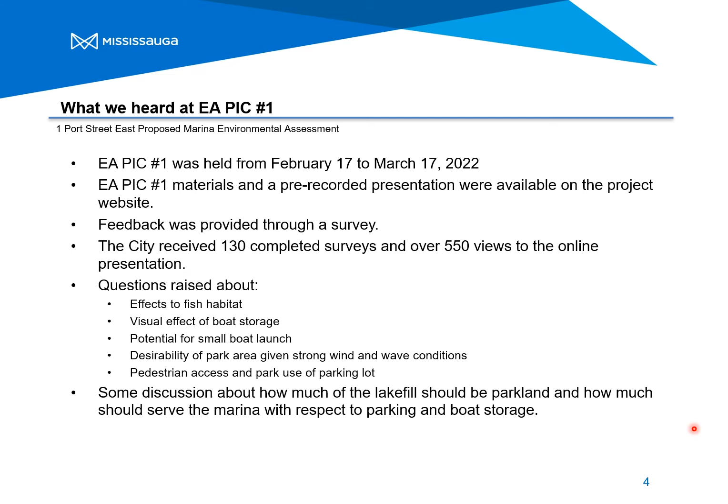We had questions about the effects on fish habitat, the visual effect of boat storage, the potential for a small boat launch, the desirability of the area for a park area given the strong winds and wave conditions, pedestrian access and park use of the parking lot, and there was also some discussion about how much of the lakefill should be available for parkland and how much this should serve the marina. Responses to these questions were posted in a summary document.

Through the survey, we also asked you to provide us with your perspective on the relative advantages and disadvantages of the small, medium, and large lakefill alternatives. We heard from you that the small lakefill alternative was the lowest cost, had the shortest construction period, and the least environmental impact, but was also too small. There was not enough parkland, not enough boat storage or slips or parking, and it really didn't add value to the community. Some respondents noted that there were no advantages to this option.

For the medium lakefill alternative, while many of you indicated it had more parkland, some responded that there were no advantages, and others responded that there were advantages with respect to cost, and that it was better than the small lakefill alternative because there was more parkland. A number of respondents noted that it was a disadvantage that there were the same number of slips as the small lakefill alternative and not enough parkland.

Generally, most respondents were very supportive of the large lakefill alternative as it creates the most parkland, has the most slips, parking and storage, and has the potential for the greatest economic opportunities and environmental benefits. The disadvantages were the construction time, the cost, and the environmental impact.

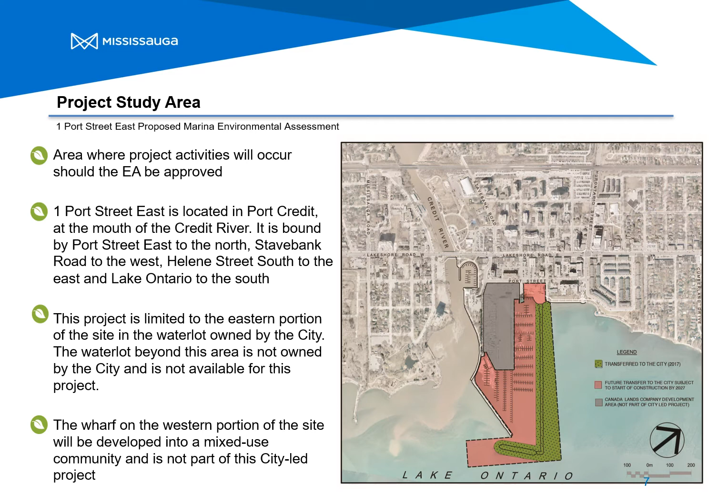Any environmental assessment requires us to look at what problem and opportunity we are trying to address. In the case of this project, we have 4 aspects to our problem and opportunity assessment. First, stakeholders and the public have communicated the desire to continue marina operations in Port Credit. The marina site is one of the few deepwater harbors on the shores of Lake Ontario. The city is exploring this intent expressed during the Inspiration Port Credit master plan process.

Second, there is a desire to support marina and other business activities for the benefit of the city and its residents. Third, there has been an identified need for the provision of additional park space and enhanced public access along the waterfront where none currently exists. Finally, this project provides an opportunity to enhance aquatic and terrestrial habitat in the vicinity of the eastern breakwater. Whenever we put fill in the lake, we are obligated to enhance this habitat to the extent possible. The reason for the relocation of this marina is that the existing marina site, currently owned by Canada Lands, is slated for redevelopment in the future.

An environmental assessment also requires us to look at the existing environment. An environment is described broadly to include not just the natural environment, but the social environment, our communities, and the cultural heritage resources. And here's what we need to be aware of when we are assessing the impacts and designing this project. We are trying to take advantage of the deepwater harbor at this site for marine activities. We are on the north shore of Lake Ontario, and all lake fill activities must be able to withstand coastal conditions. This includes wave height and high water levels. This also includes resiliency to climate change and the changes in the frequency and severity of storms that are expected in the future.

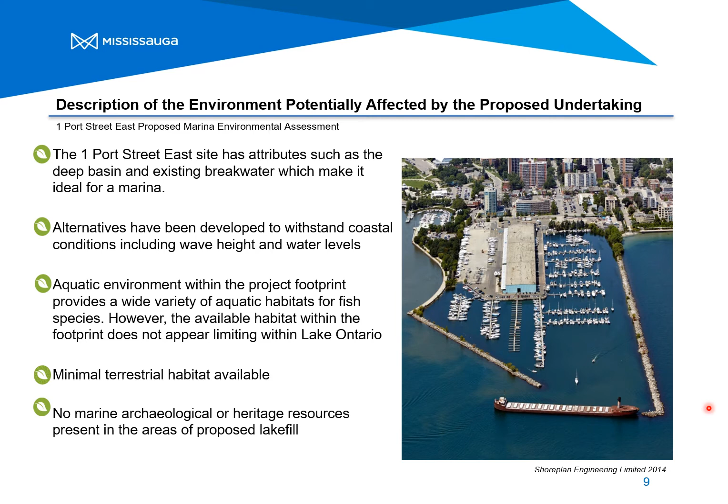As we've said at the previous public information centers, an environmental assessment requires us to look at a number of different types of alternatives. We start by looking at previous studies and background information to identify what are called alternatives to. Alternatives to are different ways to solve the problem or address the opportunity. We identified the do-nothing alternative and creating a new land base through lake fill. These alternatives were assessed during the terms of reference, and the decision was made to proceed with creating a new land base through lake fill, as it was the only alternative which addressed the problem and opportunity.

During the environmental assessment, we're looking at alternative methods. And alternative methods are different ways to implement the preferred alternative to. In this case, we've looked at 4 alternatives: the do-nothing alternative, the small lake fill alternative, the medium lake fill alternative, and the large lake fill alternative.

As I said a moment ago, alternative methods are different ways of implementing the preferred alternative to. And for this project, our alternative methods are the different configurations of lake fill around the eastern breakwater to enable marina alternatives. We undertook a 4-step process to identify and evaluate these alternative methods. First, we determined the footprint for the alternatives. Second, we identified the desired design elements, or what needed to be part of the alternatives. And in this case, parkland, the trail, and the marina elements were all part of the desired design elements.

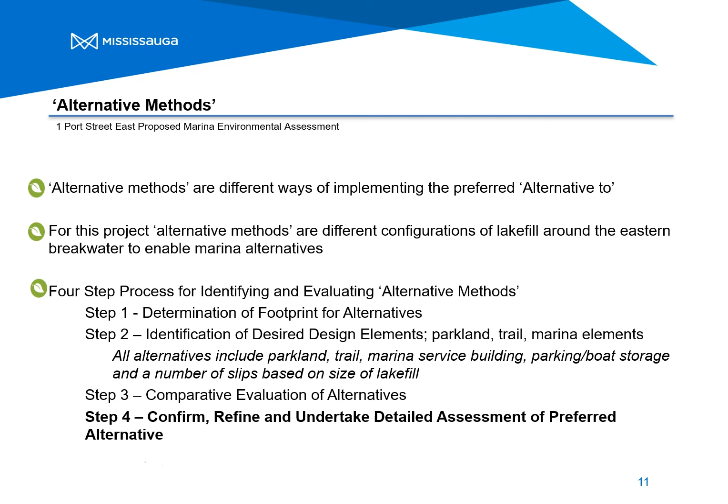As a reminder, these were the 3 alternatives, the small, medium, and large lake fill alternatives, that you saw at the last Public Information Center and provided feedback on through a survey.

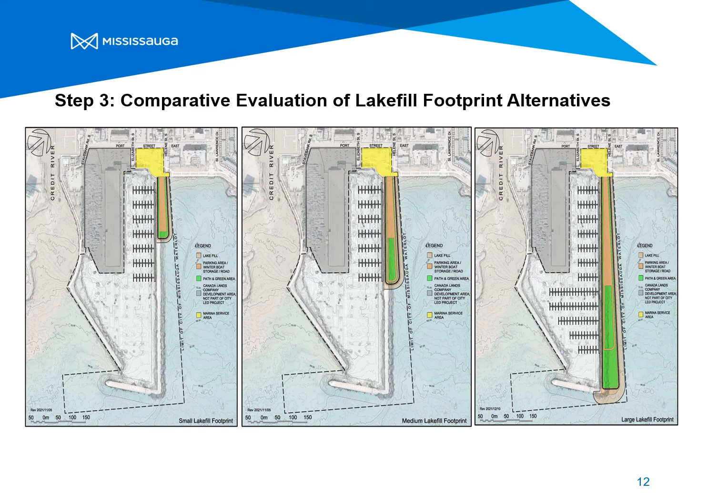As the largest alternative, it also has the highest cost and will take the longest to construct, resulting in construction nuisance effects for the longest period of time. However, the effects from construction are short-term and mitigable, which means we can make them less, while the lake fill area and its benefits will exist into the long term.

So that brings us to the step we're presenting to you tonight, which is our confirmation and refinement of the preferred alternative. We proceeded with preliminary design and refinement of the large lake fill alternative. This included refinement of marina elements, including area available for marina facilities and services, number of slips, parking, and storage, and refinement of parkland elements, including the trail.

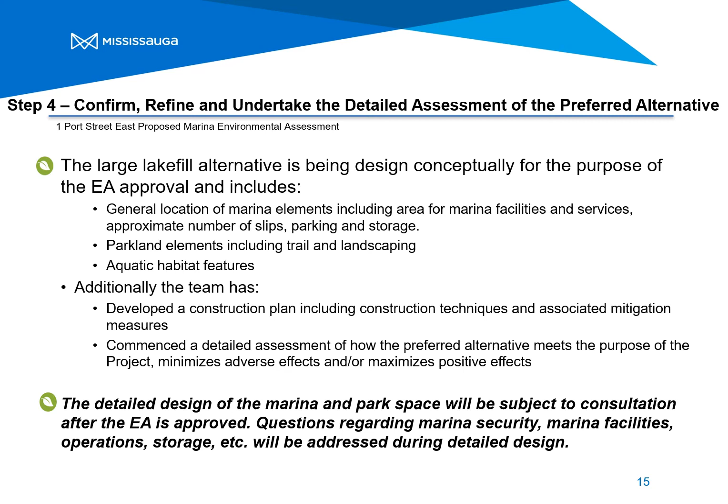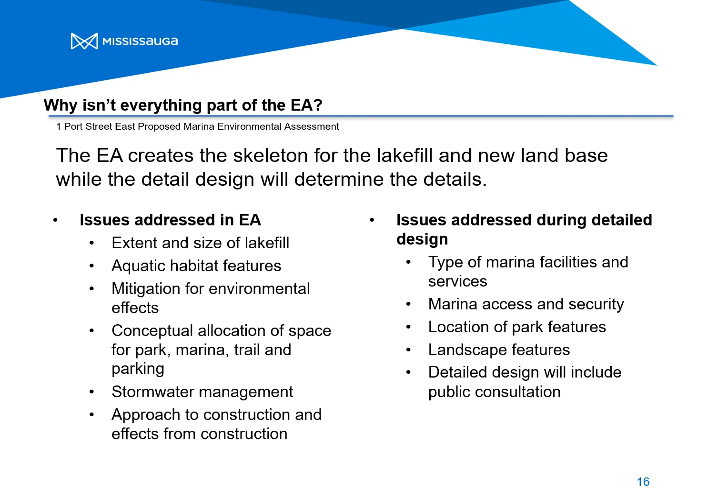An environmental assessment in this case creates the skeleton for the lake fill, while the detailed design will determine the details. The issues addressed in the EA are the extent and size of the lake fill, aquatic habitat features, mitigation for environmental effects, conceptual allocation of space for park, marina, trail, and parking, stormwater management, and the approach to construction and effects from construction. While issues to be addressed during detailed design and not subject to the EA include the type of marina services and facilities, marina access and security, and the fine detail with respect to the park features and landscape features.

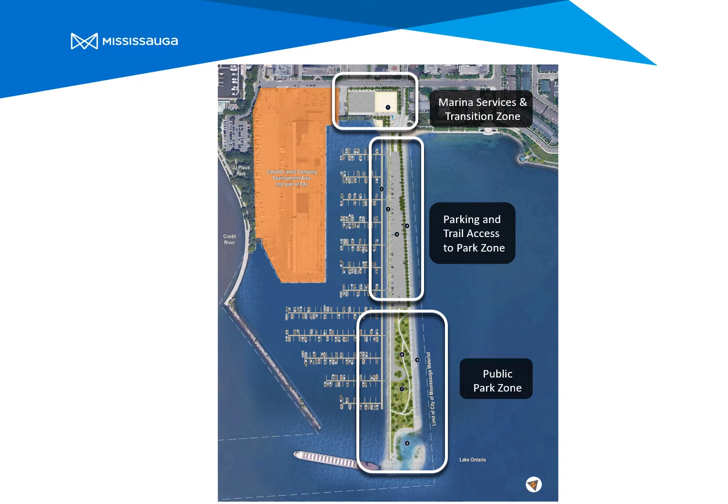The first zone is the Marina Services and Transition Zone, which includes marina services, facilities, open space, and public washrooms. This is where most of the activities will be centered on the land base. This zone also includes vehicular access into the site and pedestrian access. Pedestrian access for the marina is on the floating dock to the west of the landform, and there is a walkway along the east side of the landform to provide pedestrian access out to the park space, and it will be treed.

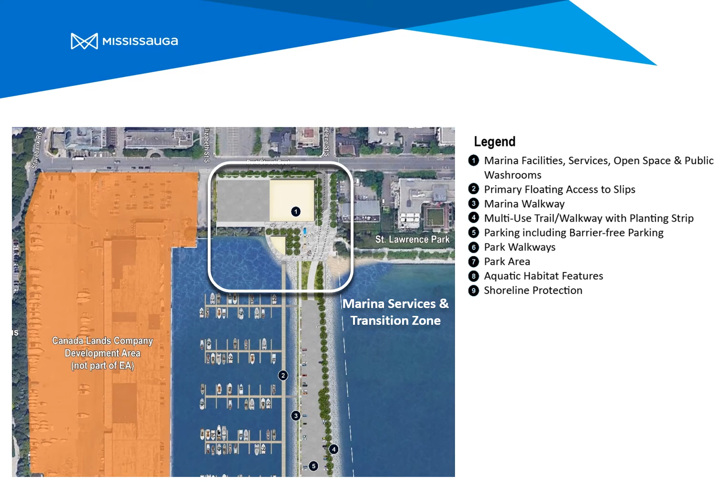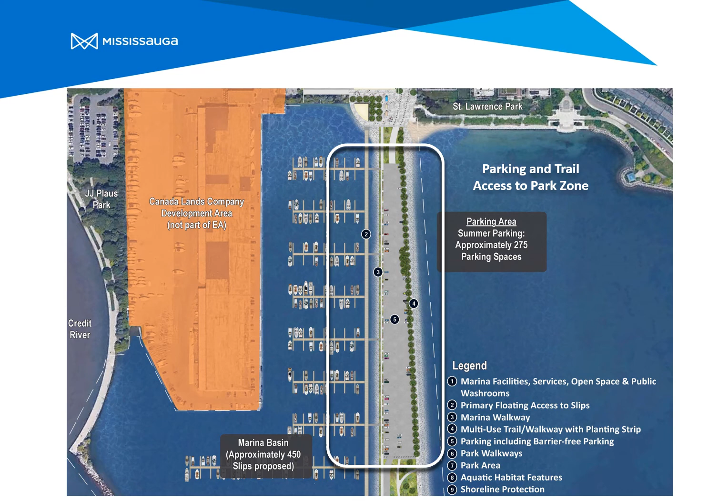One of the things we do require as part of EA approval is to mitigate the alteration of fish habitat. When we fill in the lake and create a landform, such as being proposed here, we are altering fish habitat, and we are required to compensate that habitat loss or alteration. In this case, one of the means of compensating fish habitat is the feature that has been proposed at the very end of the lake area. This aquatic habitat feature will provide fish habitat and will go part of the way to compensate the alteration of fish habitat.

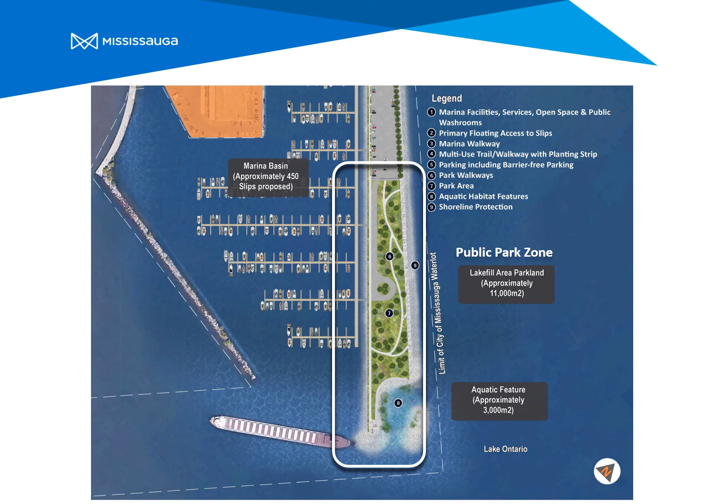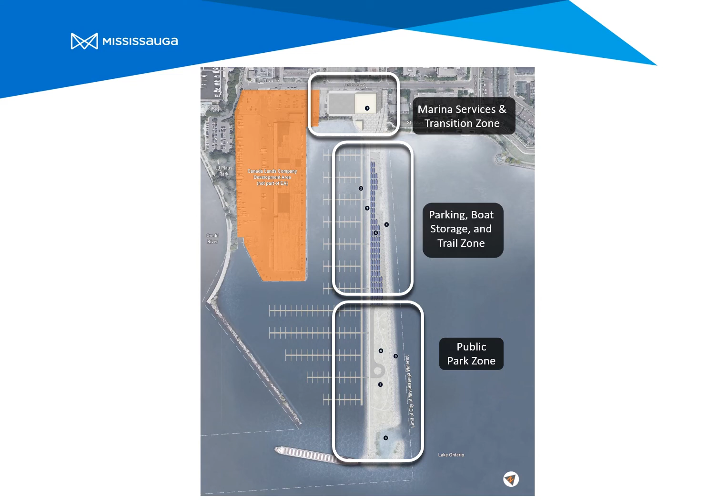One important aspect in the environmental assessment is understanding how a project will be constructed in order to understand the environmental effects of those construction activities. So we ask ourselves, how will the lake fill be constructed? We assume that materials will be brought to the site by truck and by barge, approximately a 50-50 split. Typical earth-moving equipment will be used to place the fill.

First, coarse stone materials will be placed to create a berm or an enclosed area where finer clean fill can be placed. Construction may proceed from the shore out or from the outer end in, depending on the stone, truck, and barge availability at the time of construction. Construction of the lake fill and shoreline protection is anticipated to take approximately 14 months. Once this is completed, the planting, trails, and parking will be added, and this will require additional time.

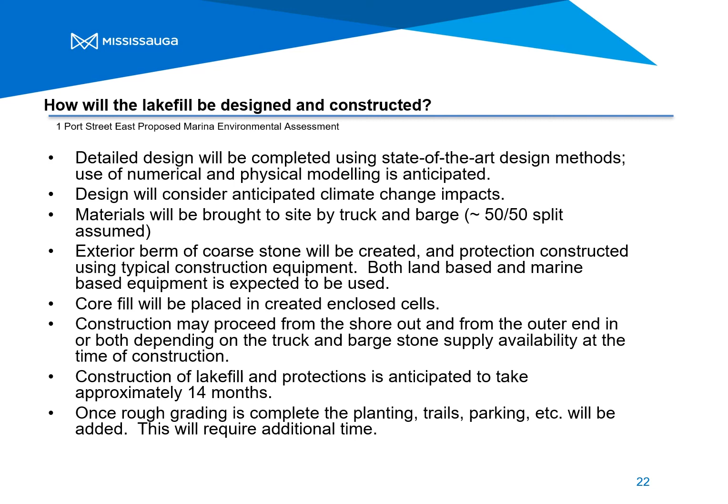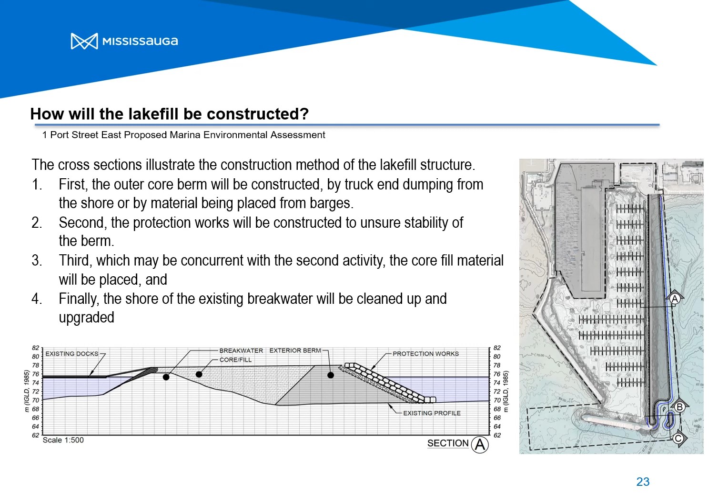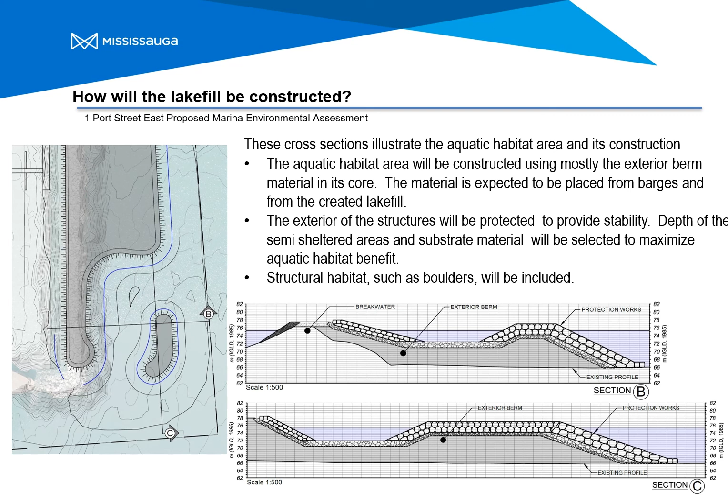Once we understand how the lake fill will be constructed, we then take that information and the information we know about the existing environment and we predict the effects of construction on the environment. We know that there will be some increased turbidity, and turbidity means sediment in the water, so when the water looks a bit muddy. And this will occur very localized in areas where the fill is being placed. By using clean materials and proper placement methods, these effects will be minimized.

In order to place the lake fill, we are going to remove approximately 28,000 square meters of existing aquatic habitat. This aquatic habitat will need to be replaced or compensated with new habitat along the lake fill edge and the new habitat feature at the park's end. Additional compensation may be required off-site. We are currently uncertain as to whether or not we can provide all of the compensation on-site.

Noise and dust from construction activities will occur over the 14-month construction period, and these may be experienced by those residents living closest to the site when construction is occurring close to shore. As construction moves further away from the shore, some of those effects will lessen. In constructing this lake fill, we will use standard best practices to minimize noise and dust. We anticipate there will be minimal effects to traffic volumes, as we are only anticipating about 50 trucks per day. And this is a fairly small amount given the traffic volumes in the area already.

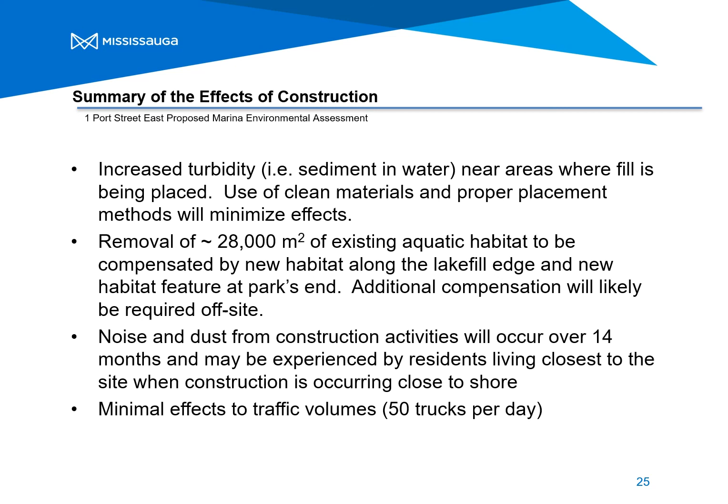We also need to look at the effects of what we are calling establishment, or once construction has been completed and the park space and marina is operational. We'll be planting native, non-invasive trees and vegetation in the park area, which will provide some new terrestrial habitat and enhance connectivity for migratory birds. We will have created approximately 11,000 square meters of park space and approximately 1,000 meters of trail with access to the end of the lake fill.

We will have also created an area available to replace marina services and facilities and provide approximately 450 marina slips. The effects of marina operations on neighbors are not likely to change, as the marina operations are not likely to change. They are simply shifting from the west side of the basin to the east side of the basin. Future parkland and associated marina activities will be visible to residents living to the north and northeast of the lake fill area.

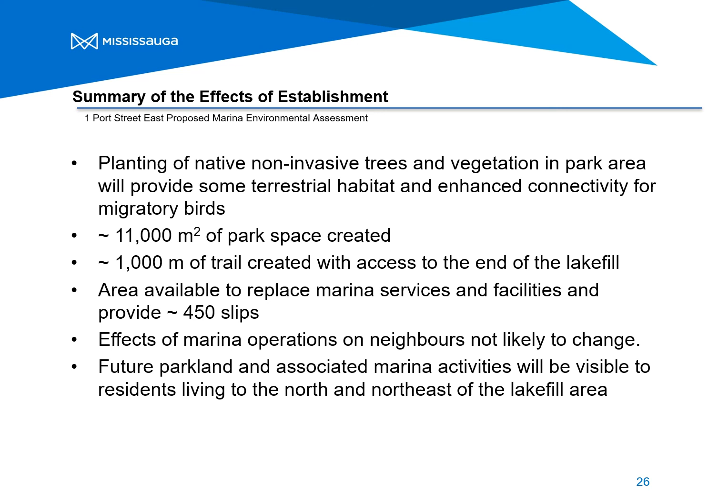Within the approved terms of reference, the city committed to undertaking 3 public information centers at key decision points during the EA. This is the second of 3 public information centers. As I said earlier, we hope to hold the third once the draft environmental assessment report is available for your review. There is also ongoing consultation and engagement with Indigenous communities and regulatory agencies occurring at this time. We are also consulting with community and interest groups.